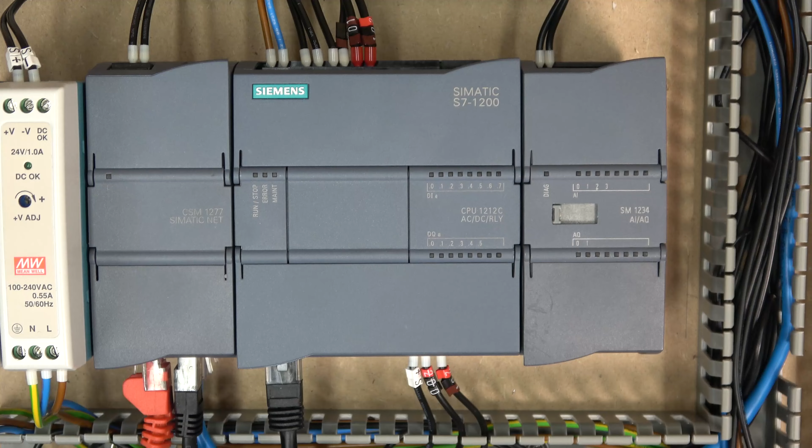Alrighty, so where we are. So first thing we need to do, we do need to make sure the PLC is off. So let's take these lids off. When you plug on this card, you do need to make sure the PLC is off. If you plug this card on by any chance and your PLC is on, it's gone.

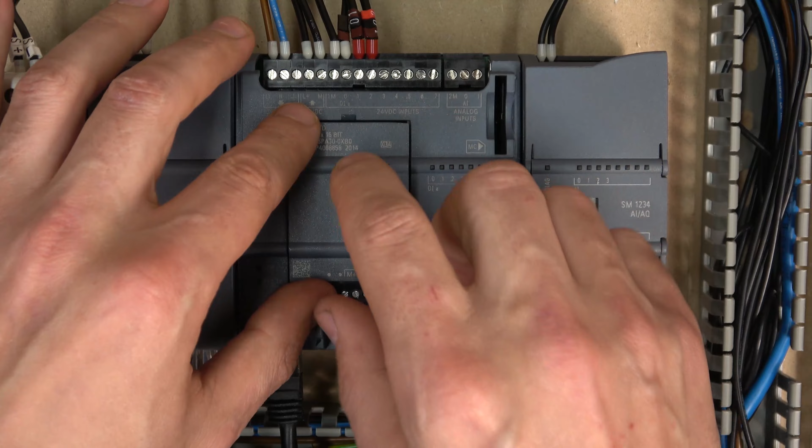So it will short circuit something in here. The whole PLC is going to be fine, but just this additional card part of the PLC will no longer work, and you will not be able to discover anything. It's dead. So whatever you do, do make sure the PLC is off when you add the cards. Nothing's going to happen to the card, but this part of the PLC itself will not be accepting these cards anymore.

How do I know that? Guilty as charged. Done it myself literally a couple of weeks ago. Completely didn't think of it, plugged it on, and just realized the PLC was on, and pretty much that part was no longer working for the PLC, so the whole PLC had to be replaced because I need to use this card.

So I wish Siemens somewhere in there would put a bloody big fat sign saying make sure this PLC is turned off or bad things will happen. So it happened to me. Maybe in the later versions that's been rectified, but for the 2.2 firmware version, that's what happened. So yeah, that's out of the way.

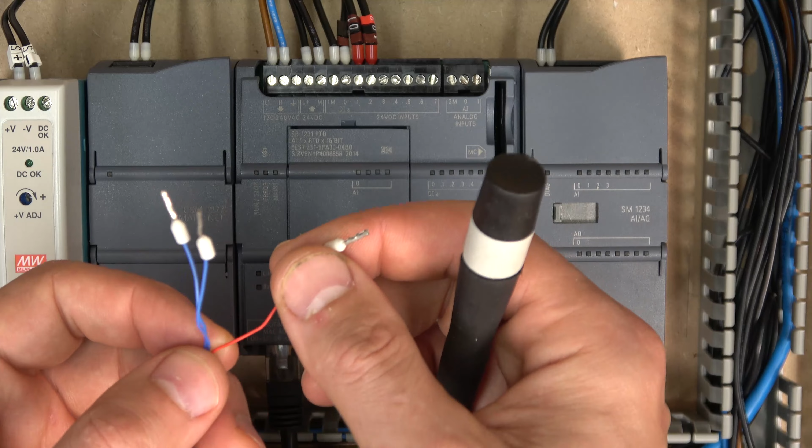When it comes down to wiring, we're going to be using a standard PT100 probe with two blue wires and one red. Red, as usual, in most cases is always going to be plus, and these two are going to be minus, and it doesn't matter which is which. So once we go in here, as you can see, you have two dots. They mean nothing, just ignore them. There's M plus, M minus, I plus, and I minus.

There are three different types of PT100 or PT1000 probes: 2-wire, 3-wire, and 4-wire. Today we are going to be working with the 3-wire, as you can see in here. The plus is always the red. In most cases, if it is not red, it is clearly marked as a plus. It will go into the plus, and for this card, it will go into I plus.

The other M plus is meant for the 4-wire. So if you had another plus, then you would use the M in here, but we don't have that. So what we're going to do, we're going to link it out. We're going to put a silly old link cable in here. So let's just put that in there.

And put that in there. Does look silly, but yeah, it'll do for now. So, and the other two, both of the blues, it doesn't matter which way it goes. It will still be fine. So we're going to put that in here. One goes to M minus, another one goes to I minus. And that should more or less solidify our wiring. And that's pretty much all there is for the wiring.

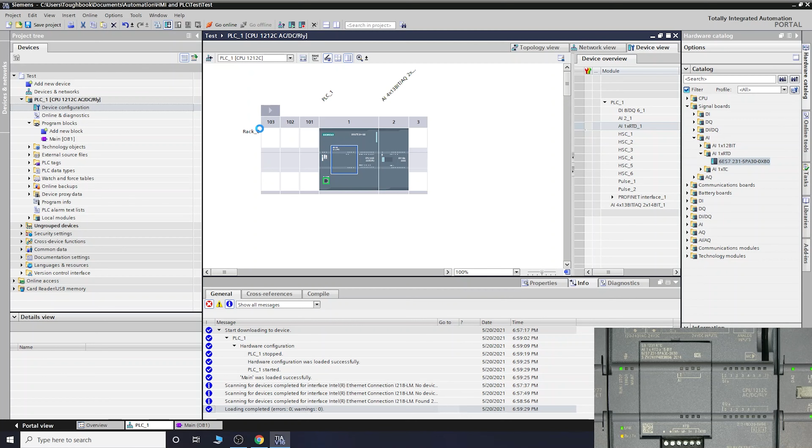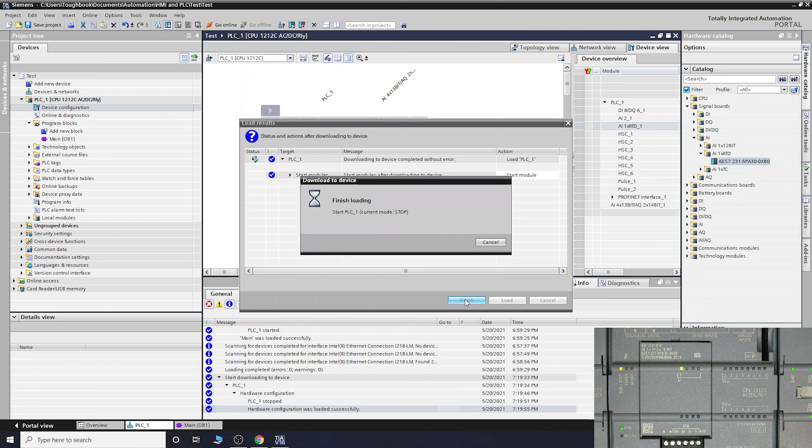So once we did that, we just load that into the PLC. So we accept, start new configuration. There's a new card. There we go. Let's load that. Let's finish on that one. So once you finish that one, the LED light should have come on. And let's go online, make sure everything is okie dokie. And as you can see, no errors, everything's lit, the card is ready to go.

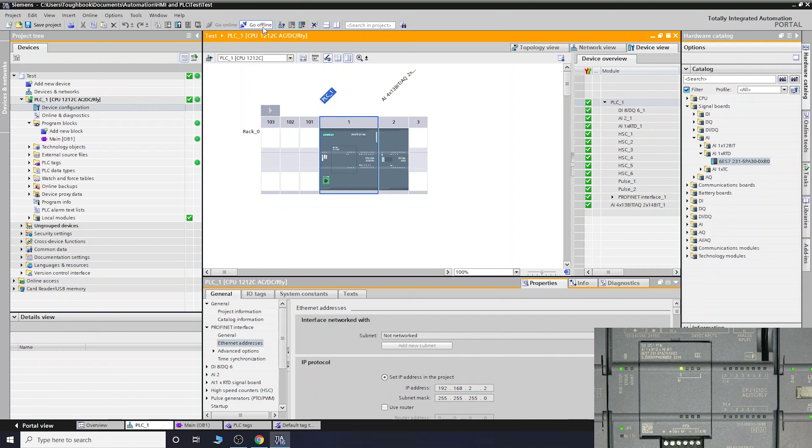From there on, let's go offline. Everything's singing and dancing now, so we need to make some configurations. So click on the actual card itself, double click it. It will open the RTD signal board properties. So in analog signals, there's a couple of things you can change. We can leave that at the 50. The one thing we need to set in here, because it's a PT100, is that it is 3-wire. So we're gonna do that.

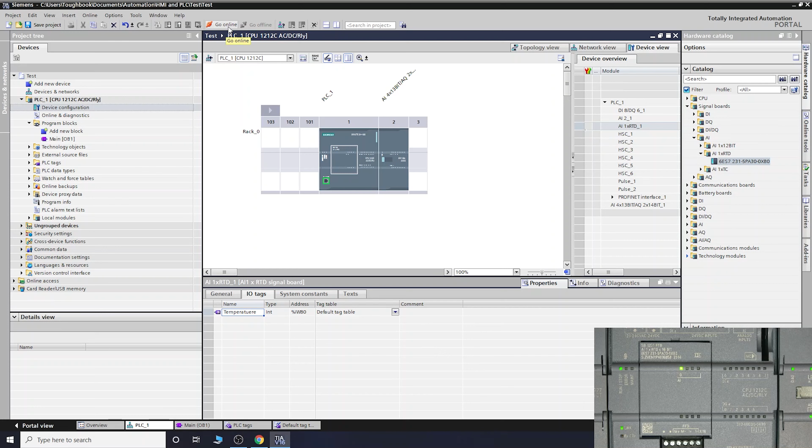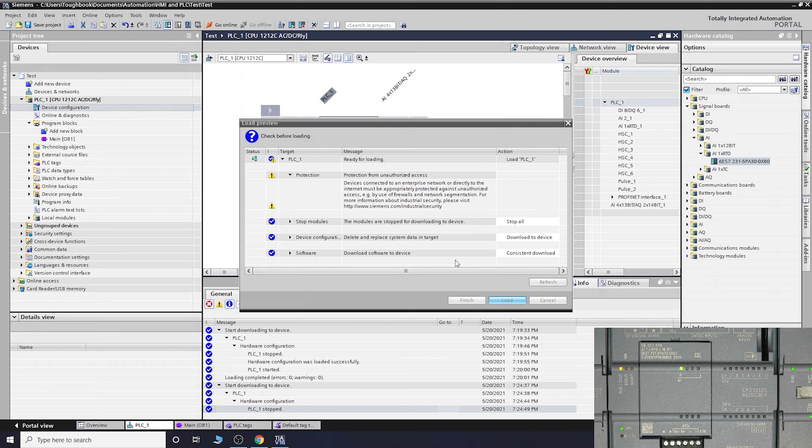And from there on, if you go in there, the IOs are 80 and 81. So as you can see down there, that's where the address is kept. So we're gonna call it temperature. So there we go. We just created a tag. Click on the controller. Let's load that in one more time. There you go. Load. Finish. So now I just updated that it is 3 wires.

And after that, we are gonna go into PLC tags. Default tag table, depending on what your tables are called, but I'm gonna go for default. And as you can see, because I already named it, it showed up in here. It is in IW80, and if you click monitor, there we go. It's roughly measuring 207, which I think is 20.7 degrees in my workshop now.

So let's put a hand on. There we go. I'll put my hand on it and the values will start going up quite fast. So our temperature probe and RTD module is working very well. From there on, you are free to do whatever you please with these values. There's a whole lot of things you can do. Put it in cold water and it ramps all the way down. And that, ladies and gentlemen, is how you wire the Siemens RTD module for PT100. And it was getting too cold now.

And that will do for this video. So that's how you are able to test, because all the name tags are always going to be in the default tag table, and you can watch them through here. And that's how you test your module, if you need to make sure that your temperatures and everything are working well.